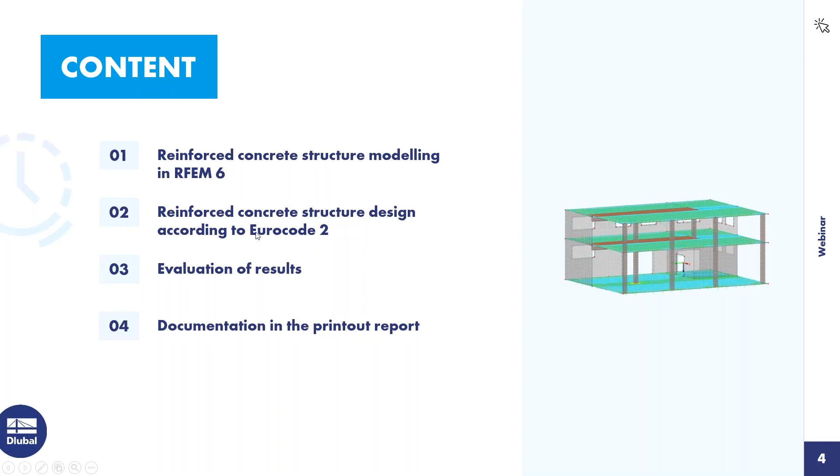I will show how we can work with the graphical displaying of the results, and also how we can print the results into the protocol in the printout report, and documentate our calculation. I will go now directly into the structure, in the RFEM structure.

The structure was already defined from the members and the slabs. I only give you a short overview about the used objects, the basics of the reinforced concrete design, and also the design of members, the reinforcement, and definition of members.

Also the design by using member representatives, if we have more similar members, was shown in the first webinar for reinforced concrete structures, which was made or shown in November of last year. There the basic steps are shown, how you can define the properties and settings, and my colleague Caroline will write the link into the chat where you can find this webinar. It is very good for the beginning.

So therefore, I will go now today in the design especially to things which weren't shown in the first webinar. So the punching design was not shown in so much detail, and also not the rib design.

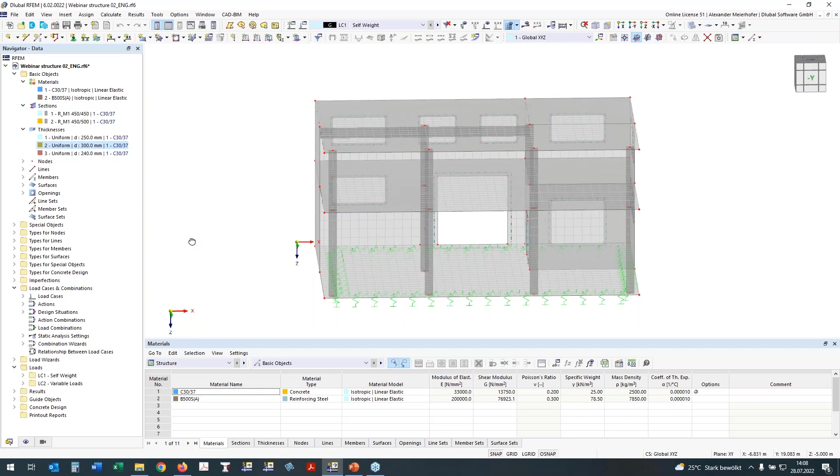The building now has elastic springs, so elastic support, and this will have also influence later in the settings for the deflection design, which I will show you.

At first, I want to deal with such nodes where we have the connection between the columns and the slab. Here we should place mesh refinements to have a better FE mesh. For this, I go to the data navigator, where by double click I can open a new nodal mesh refinement, and give my settings: radius 1 meter, and the inner target FE length is 15 centimeters.

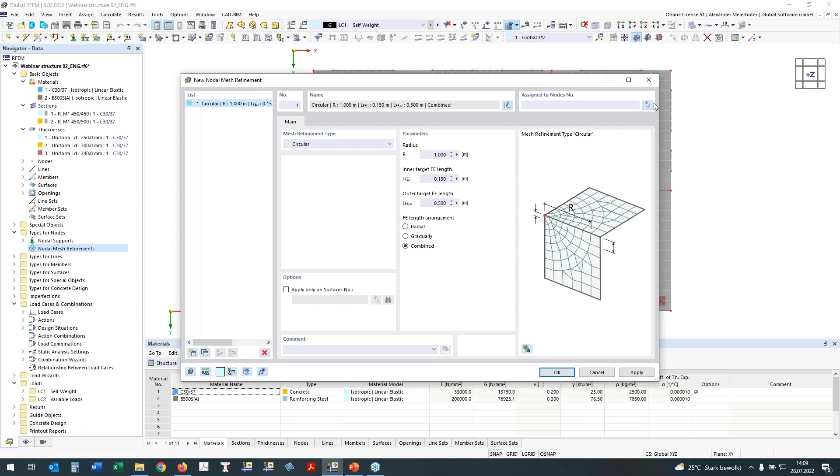It comes from the dimension of the cross section of the columns. For the length arrangement, I use the combined approach, and now I will assign the nodes with two rectangles where I want to have the refinement. If we look at it in the isometric view, we see I have it captured, and everywhere now has my mesh refinement.

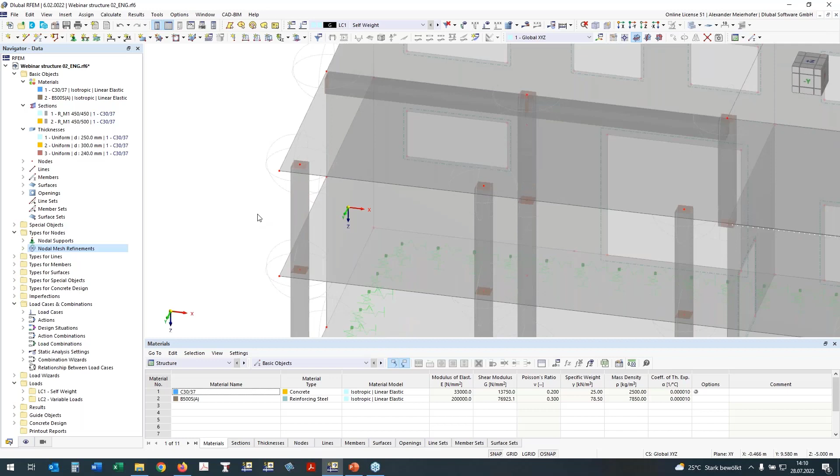On these nodes, from the column and the slab, we also have singularities, and how we can deal with these singularities in the concrete design is described in a very good knowledge base article on our website, which I want to advise you to read. Caroline will also send the link to this technical article in our chat, so you can find it very easily.

I will continue and select one approach, which is the use of the surface result adjustment. It means I will select or define the area which is exactly the width of the column, and set there the inner forces of the surface to 0.

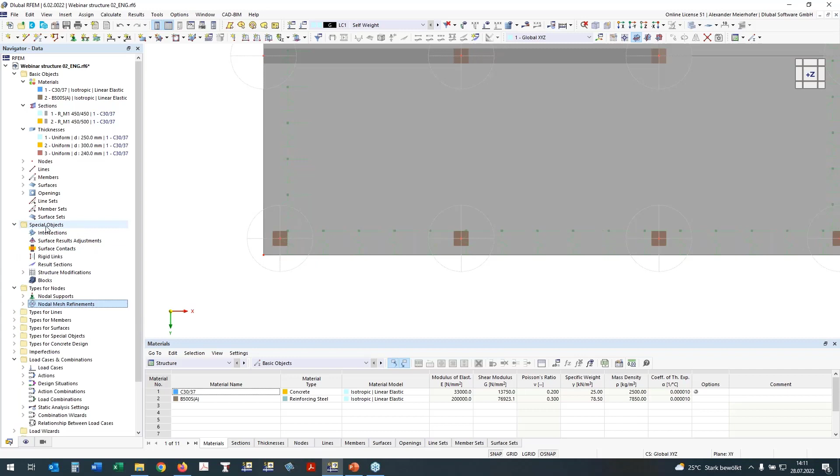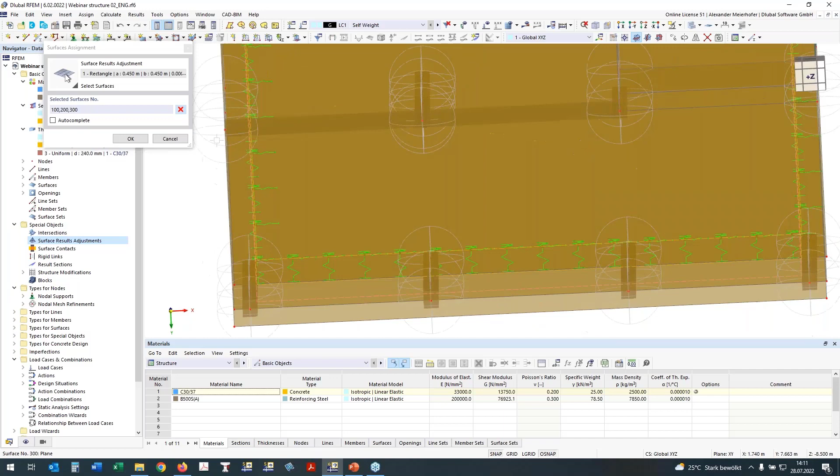Surface result adjustment can be found on the special object. By double click, I can open the dialog, and now we can define a new rectangle result adjustment with the dimension of our columns. I want to have it on all 3 surfaces, and you see the numbering of my surfaces was chosen so I know where each is placed. So 100 is the slab on grade, 200 the slab over the ground floor, and 300 is the slab over the first floor.

If I press OK, I have already assigned the surfaces, and now I have to define the center of my adjustment. Here, by copy, I can simply copy this adjustment and set only the new center of the result adjustments, and then I will have it in all areas.

I make one new adjustment and want to define it also over the wall. The width is 25 centimeters, and I define a little bit bigger area, and place it here because here is a wall. I define it also in this area.

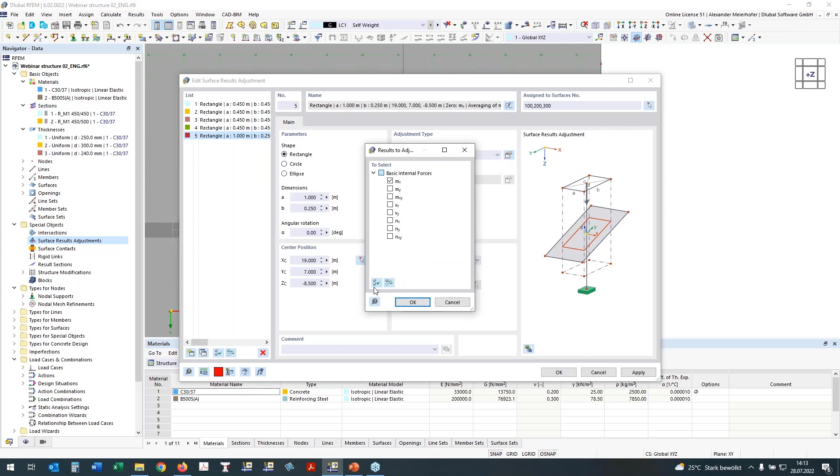I made one mistake - now I forgot to define the adjustment type. I want to set it to 0, and set all inner forces to 0, and this should be done for all defined adjustments. So I was one step too fast before - this should be done before I copy it, and then it is always in the right setting. By OK, it will be placed.

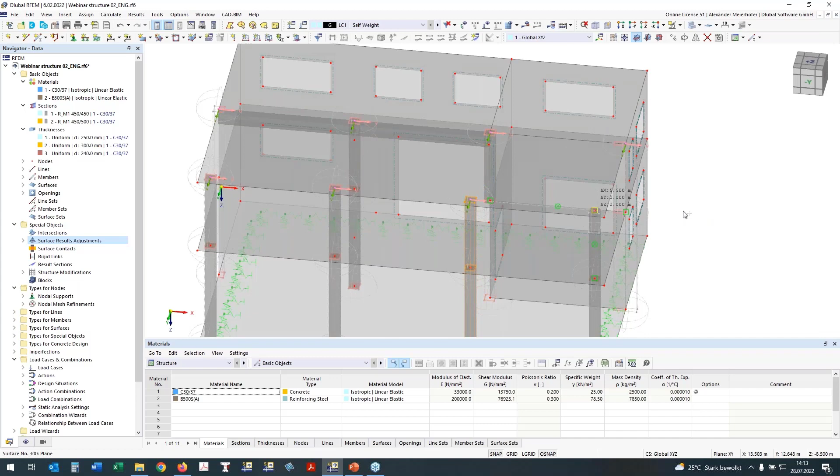We can see it, and we can also work here by drag and drop. We copy it by drag and drop. If we press the Control key, we can place it by drag and drop, and it's very simple to work with. So this is then for the connection of the columns to the slab.

One additional setting for the slab is necessary. I want to have hinges over the length of the supported line. The definition is very simple: we make a double click on the surfaces, and the edit surface dialog will open. Activate hinges, and in hinges I click to select lines, press Control, and then I have selected 3 lines where I want hinges. The hinge type is, by default, already the moment hinge, and I will apply it to all lines, line hinges number 1.

Okay, it's ready now, and if we take a look at our refinement, it is placed everywhere, and also the adjustment. In the display navigator, we can deactivate the mesh refinements because I don't need them anymore for the work now, and the graphic is then more clear for the presentation.

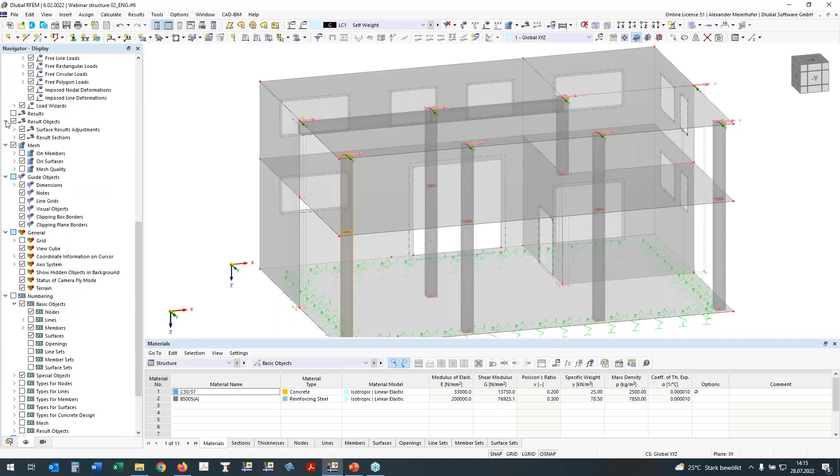Display properties - okay, it's also here. Display properties are placed now under the results objects, and then it's also deactivated.

As next step, I will define the rib for the slab over the ground floor. For this, I will hide the first floor by selection, and now I have the first floor view.

By using new member, I can now define a section rib by selection of section number 2, which should be used for the web. The web should be 500 millimeters high.

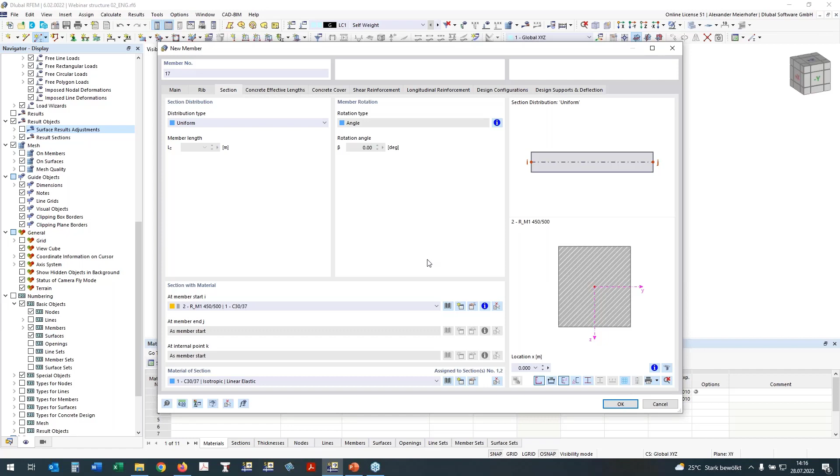I can define the rib from here to here, and also from here to here. Oh, something was wrong. Okay, I'll do it again.

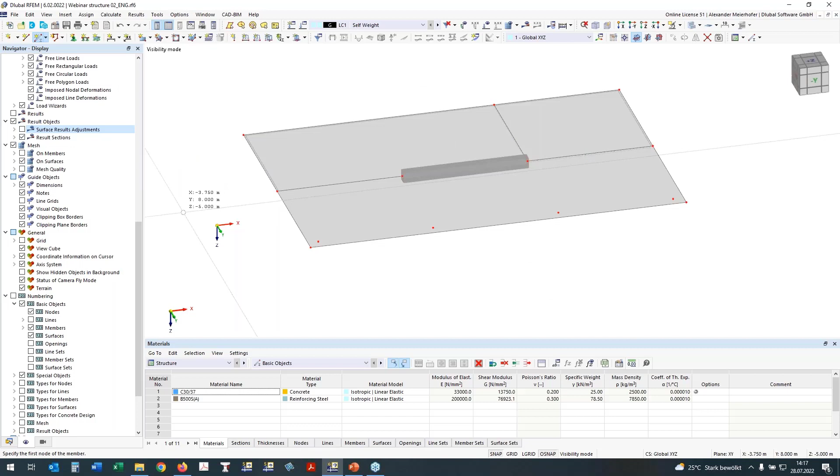I know what the issue was. I will make the selection new and select only the slab which I want to show. So the new member is the same section, section number 2, and then from here to here. By escape, I come to another point.

So if we take a look at the complete view, we see in the first part I took care of the rib. I go now into the rib section, and this is a very new feature - we can now also define more sections or segments during one length of the members. This is completely new developed.

I use here the calculation of the width, the integration width according to Eurocode 2, and the splitting of the segments can be done in 15%, 85%, and also 100%. Now we have more integration points. Here we have an inner support, which means we also have to consider the length of the neighboring span for the calculation of the integration width. So I have to define here 1.80, and now I have my different integration widths.

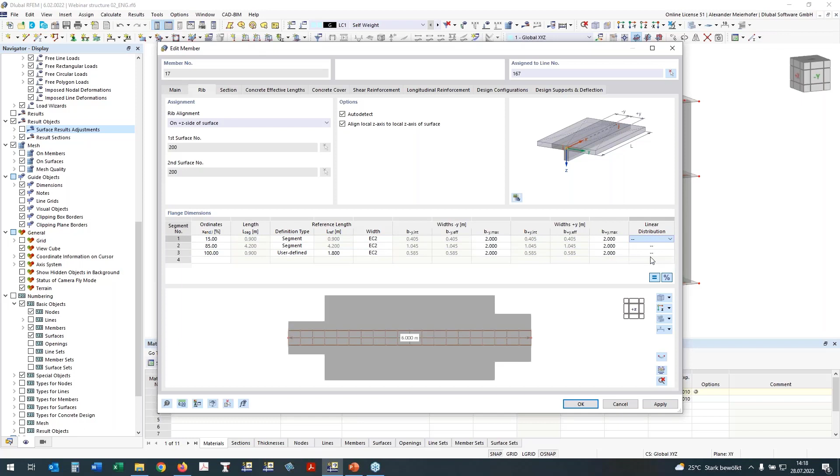We also have a new option to make a linear distribution from the integration width, and now we have defined the rib for the design.

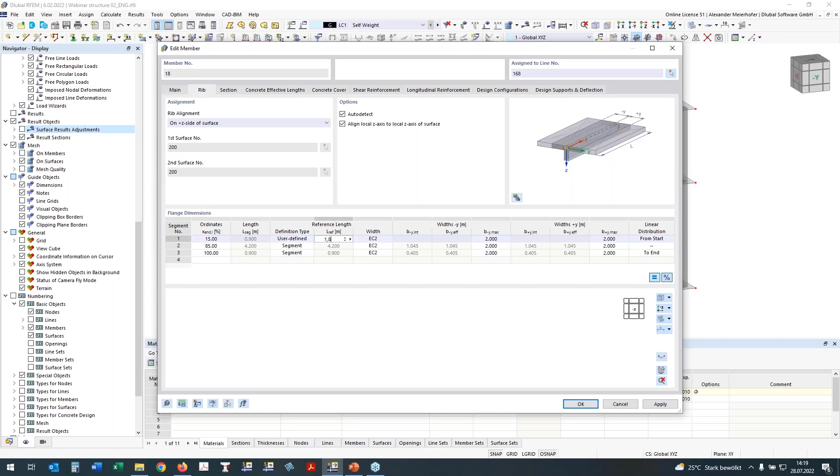For the second member, I use the copy of object selections - it's a very nice tool. If I click here, we have really copied all inputs. It's a rib, and the only thing I have to change is that the end field is related to the segment, and this is for the user-defined 1.80. Then the inputs for the static analysis are ready.

And now I do it again what I did before. A very nice feature from RFEM 6 is that we can show the rib section also in the graphic, and we see that the integration width is also shown here in our main RFEM graphic.

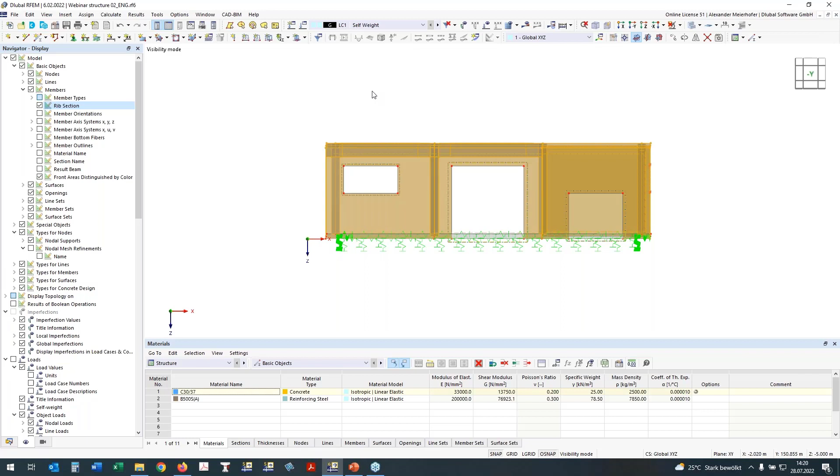Okay, now I will select again my slab here and continue with the definition of the design properties. The design properties for the reinforced concrete calculation are activated by double click. I come into the surface dialog, and I continue with the concrete cover.

The concrete exposure durability is defined by the exposure class, which defaults to XC1. This is what I'll leave - it's okay. The design direction of the reinforcement has the first direction going in X. This is also default, which I will not change.

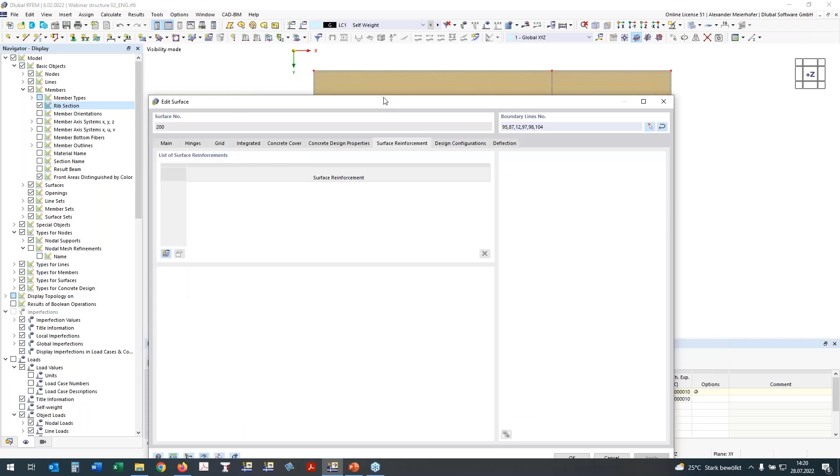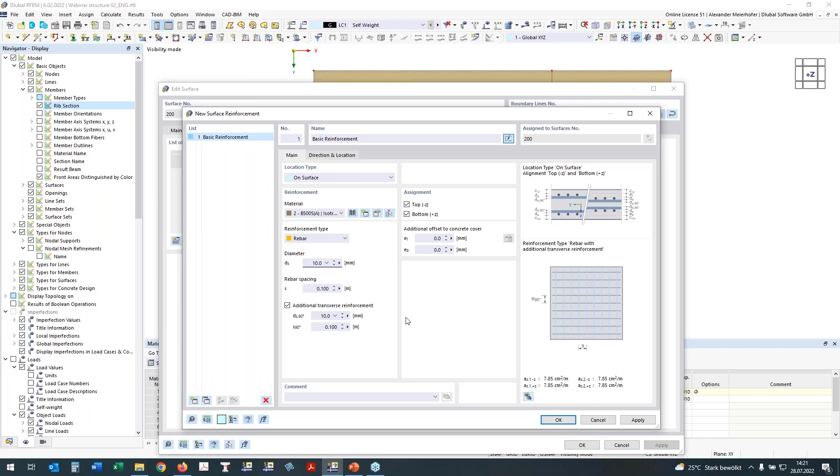And here is one important topic. In the surface, I need a surface reinforcement for the diameters so that I know the statical depth for the calculation. I just design a type of basic reinforcement, which will be in both directions, diameter 10 with a distance of 10 centimeters, and by pressing OK it will be assigned to the surface.

Here are listed design configurations, which I won't discuss today - this was covered in detail in the first webinar. I will later take a look at the serviceability configuration.

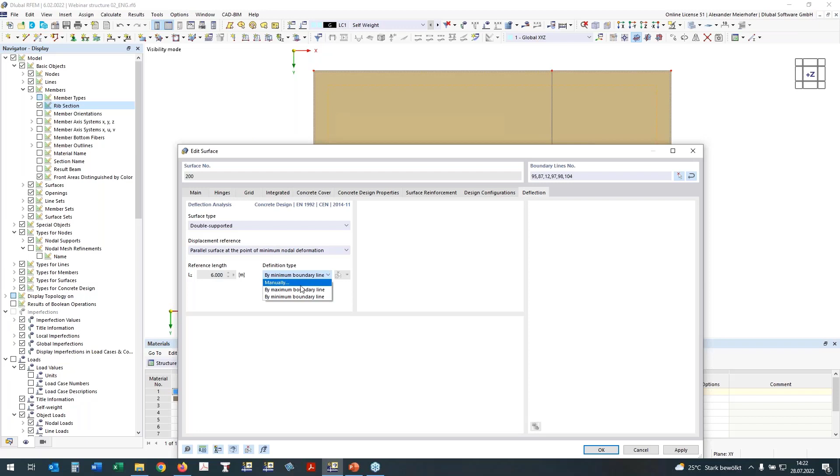But here's one very important thing, which I mentioned at the beginning: we have an elastically supported structure. Therefore, it's an advantage to relate the deflection to a deformed slab or plane. Here I use the parallel moved slab as a reference plane for the deformation, and as reference length I'll define it manually by 2 points - my reference length for the maximum allowed deflection is from here to here, about 5.5 meters. By OK, I have defined all properties for the reinforcement design.

We can also take a look at the graphic. If we go to the types of concrete, we see here we have surface reinforcement longitudinal, and if we activate it, we see that the reinforcement is defined in this area.

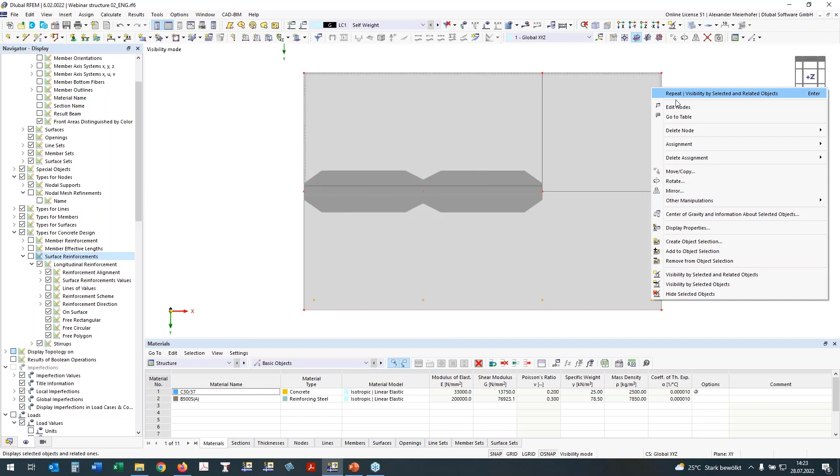Okay, I said I would take care of the punching design of the nodes which are here. So as with all objects, we have to select it and go into the nodes or object dialog, edit nodes, and activate the design properties. Here it's only important now that we check for design of the punching groove, and then we will have assigned the punching groove in the add-on concrete.

I will go now to the definition of the ribs. Here we need also reinforcement. I want to design not two members, I want to design it with a set of members.

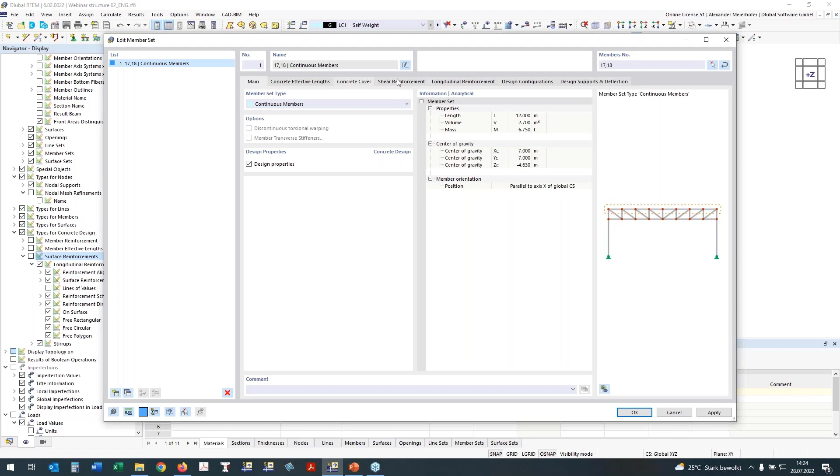So therefore I select both by pressing the Control key, and they create a new set of members. Here we have now the new set of members, and I can say design properties for this set of members, and we see that now all inputs for the design properties are open. It means the concrete cover is now shown, and here we have also the same durability which we have already used for the slab, XC1, and the shear reinforcement.

I will change the distance to 50 centimeters, and if we take a look in another view, then we see here the cross sections, or the variable cross section of the rib, is already shown here, and also there is the reinforcement, and I will go to the longitudinal reinforcement.

We see here the reinforcement which we have defined for the slab design is already placed here. If we go more we will see it. It is activated by this icon. If somebody doesn't want it, you can deactivate it or let it. I want it, so therefore I will let it here.

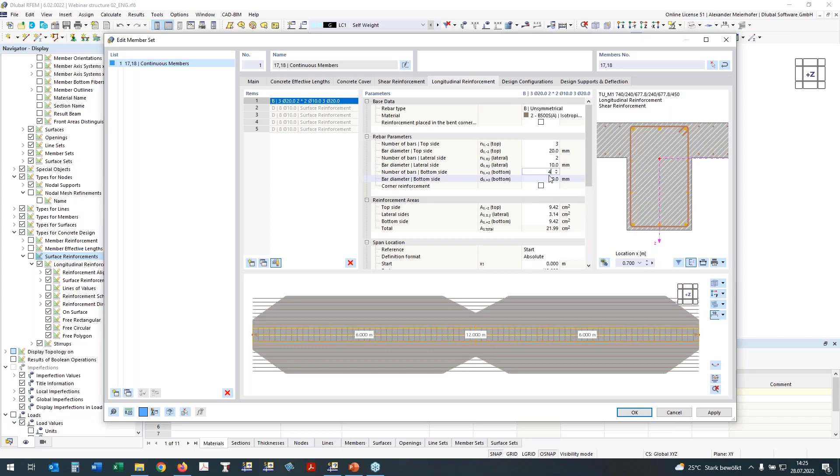But I will define now a different distribution of the longitudinal reinforcement. I want to have it unsymmetrical here in the web. So therefore on the top side I will define here these three rebars with diameter 20, but a lateral reinforcement also of 2 diameter 10. And on the bottom side I want to have 4 diameter 20. And it will be directly updated here in the graphic.

Here is also the 3D graphic of the reinforcement, which can be used for control of the inputs. Here we see a small reinforcement drawing, also the used shear reinforcement, which can be activated or deactivated. It's nice for control and for printing. Okay, I can close it.

Design configuration is the same like for surfaces in all parts. And now there's one important tab. We have to define now the deflection properties or conditions. I want to check it only in the deflection in Z direction for the gravity loads, of course.

Here is the point: my reference is then the deformed segment ends. This is now also the point which I mentioned. We have an elastic supported structure, so it means also the supported ends will be a little bit displaced in Z, and this I don't want to have in the design check for the deflection.

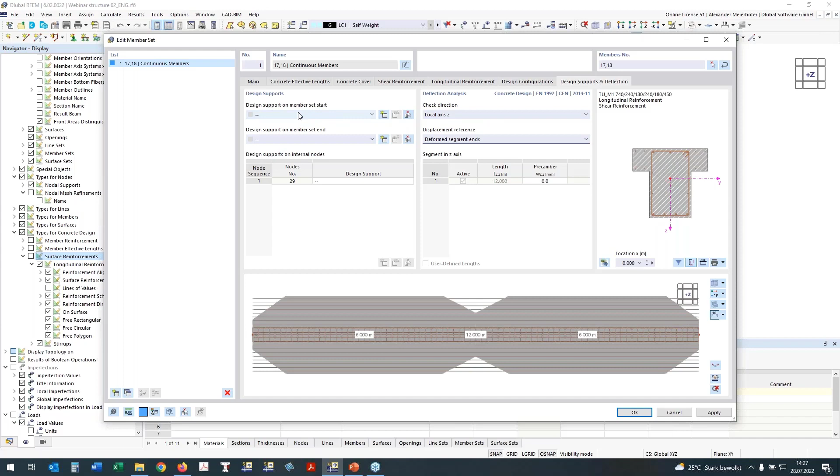Important is that I generate on the ends or in the middle some design supports. We have here design support in Z direction, and our wall is 250 millimeters. It's a monolithic connection, and will be used for the walls on the end and the start. I directly copy it and use here also the width for the columns, which are inner supports, and here I have to deactivate inner supports and press OK, and then it will be placed directly at the beginning.

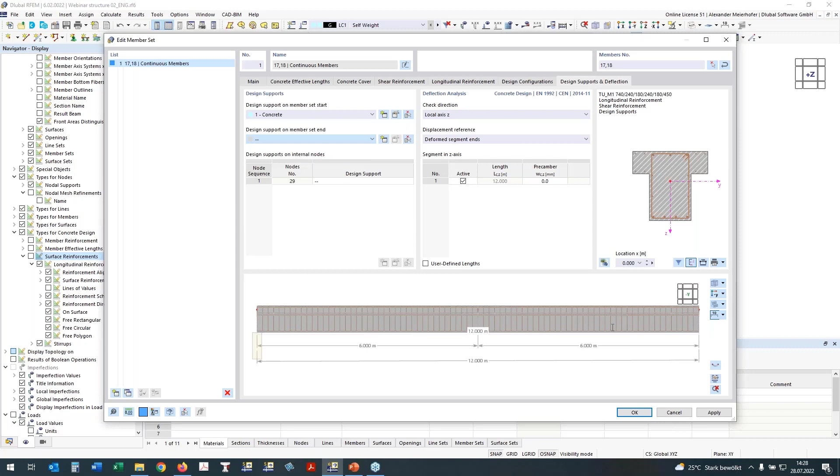I will change here the view to see it. Here we have the first one, and at the end it will be also placed, with the 250 millimeters width. And in the center I will also use the design support, but it is now for the column and it's bigger, it's 450 millimeters.

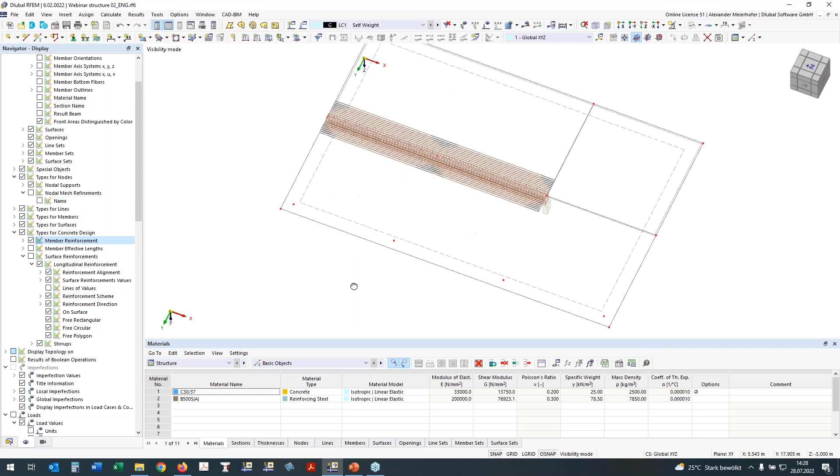And we see here now for deflection we have some lengths, 6 meters and 6 meters, and if we have some pre-camber we could define it here, but in this case I don't have it. But okay, we can confirm the inputs, and also we can check the member reinforcement and display it, and see that everything is okay.

Before I start with the calculation, I will make now new object selections. I have to be a little bit bigger. Create new object selection, and the advantage which will be done with this object selection you will see immediately after closing the dialog.

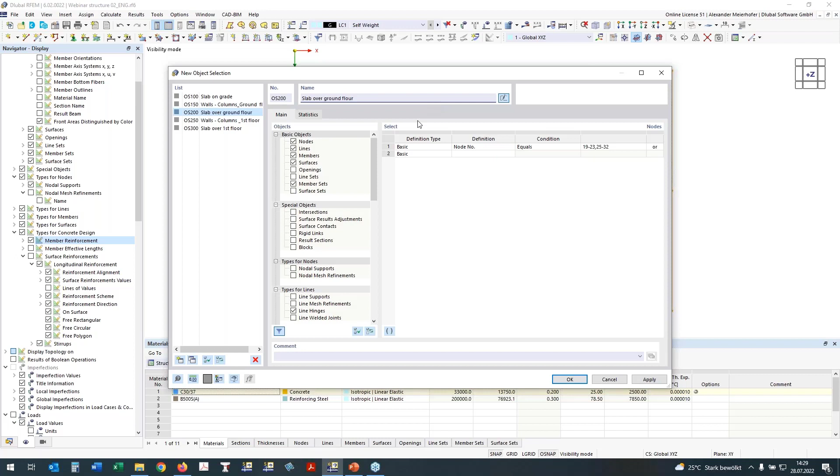This is my slab over ground floor, and I press OK. And now we have here in the guide objects, the object selections, and you see I have already done a little bit more, but the new one is the object selection number 200.

And if I go now to the concrete add-on, I can use the object selections directly to define all objects which are there in the add-on. It is then replaced, and it will only show the object, and it is very good to organize the work.

Before I start with the concrete design, one hint where you can start, or what you have to check in the basic settings: you have to activate the concrete add-on in the design add-ons, and in the standards you have to define the used standard for reinforced concrete design.

Here I will use Eurocode 2, with the original rules, so without national annexes.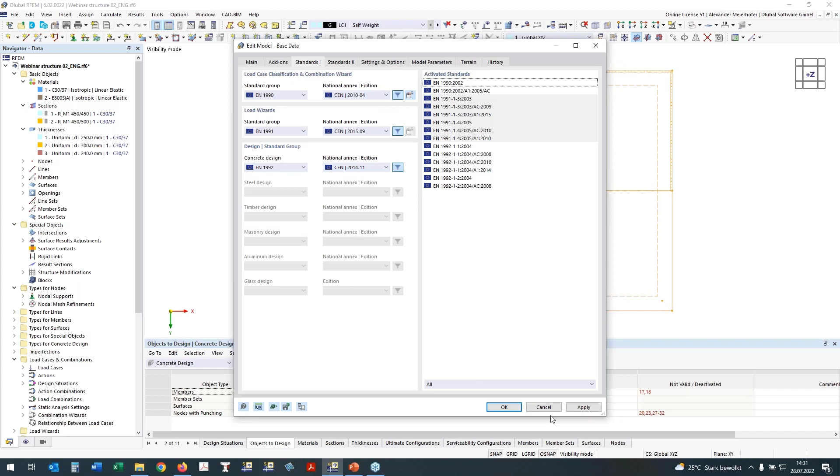If we have the loads, this is also one additional hint. I have defined a load case, self-weight and variable loads. We have to define the action category there, it's for the office. And in the base data, I have the combination group and the combination wizard defined. In the design situation will then automatically be listed the serviceability and the ultimate limit state design situations.

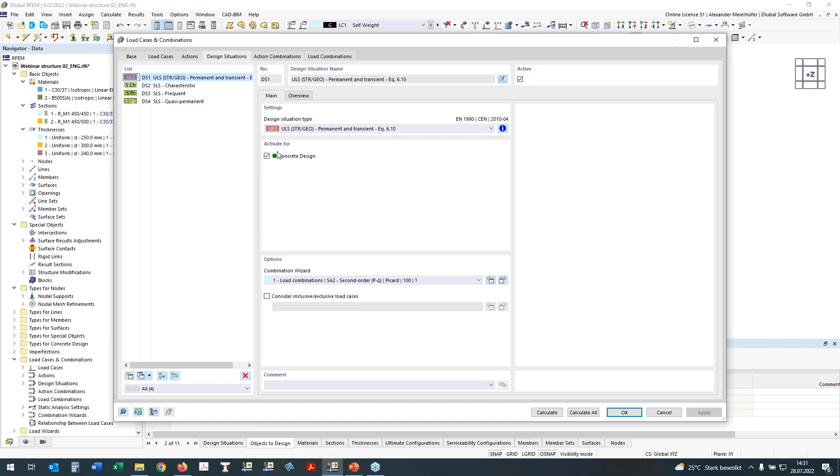Here will be the list of all activated design add-ons. We work only for the concrete design here, so I activated it for the concrete design, and all load cases which are related to this design situation will be calculated.

I can multi-select it, and what I have to do is select my combination wizard. The combination wizard here is defined in this way, that we have to generate load combination, and the static analysis should be done by first order and geometrically linear.

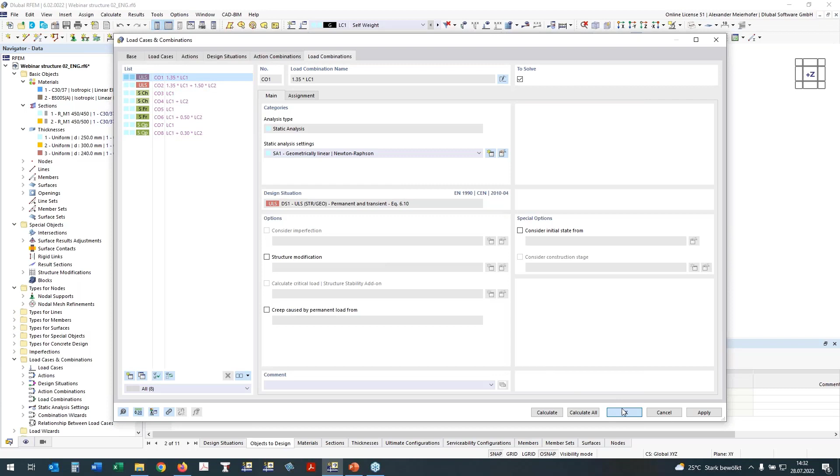If we go then to the register load combination, this combination was generated automatically and will also be used in the design of the reinforcement.

Now I go back to the add-on concrete. We have here already designed the object selections. Material and sections are only listed for control. Here are the configurations or settings which should be used for the ultimate limit state.

Here we have the serviceability state. I will take a look at the serviceability state configuration, and here we have the stress check, which should be done, or the crack analysis should be done by finding automatically the limit value for the crack width. So it is here according to the exposure, the defined exposure class. We have XC1, so therefore I expect in the calculation 0.4.

With deflection calculation here, we have this L, the reference length divided by 250. And here is the crack state detection for the serviceability.

This I want to explain a little bit more, because this is really new, which we released 2 weeks ago, and therefore I'll take a little bit more time for it.

The first one is the crack state calculation for each associated load. So each load case or load combination will be considered and calculated for itself.

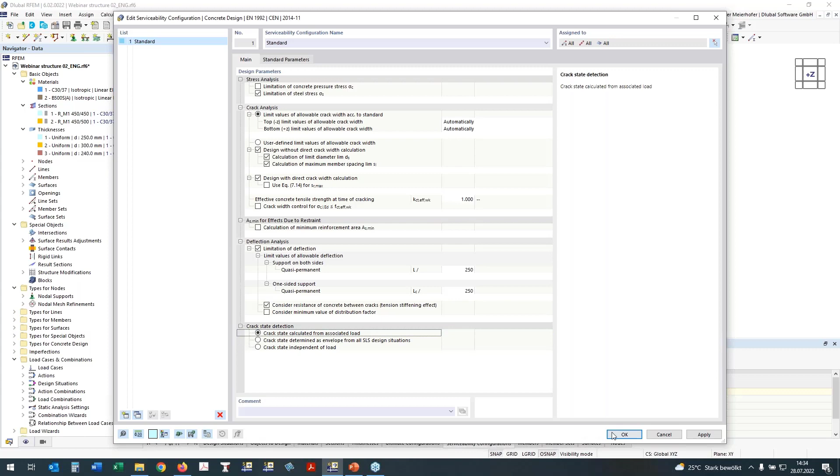Calculate the deflection only in a cracked state, independent of the load. It means all elements will be considered as if they were cracked. I'll add it in the first setting and confirm it.

Now I think we can already start the calculation of the static analysis. So firstly the mesh will be generated, and as the next step the static analysis is done. And you see here we can now use more cores of the PC. I have 4 cores, and there will be 4 calculations in parallel.

It is very fast. Here in the concrete calculation, a pre-calculation of the stiffness will be done, to check if there are cracks or not. Then a second step of the finite element calculation will be done, and the deflection will be calculated. And in the last part of the concrete design, the cross sections will be designed, and the results will be prepared for display, in the table, and also in the graphic.

Okay, so now we have an overview of what is fulfilled and what is not. We have very detailed tables. This work with the tables was also shown in the first webinar. Today I want to work more with the graphics, and use now only the settings for the member.

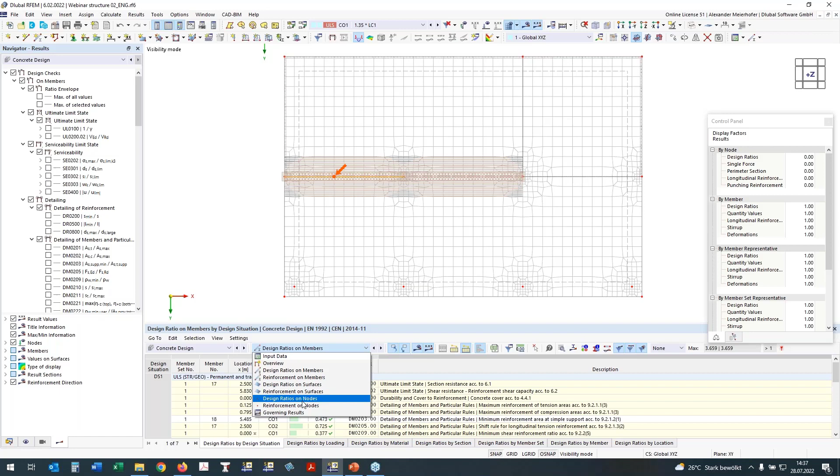The design ratios, one thing more, are also differentiated or sorted by members, by surfaces, and by nodes. Design ratio for nodes is also new, and this is the design ratio for the punching proofs, and we see here it's not fulfilled.

I will go now to the graphical results, and firstly we took a look at the results of the surface. I want to activate it as only extreme values, and here we have the panel showing the ratio of the defined reinforcement, the ratio between the provided and the needed reinforcement.

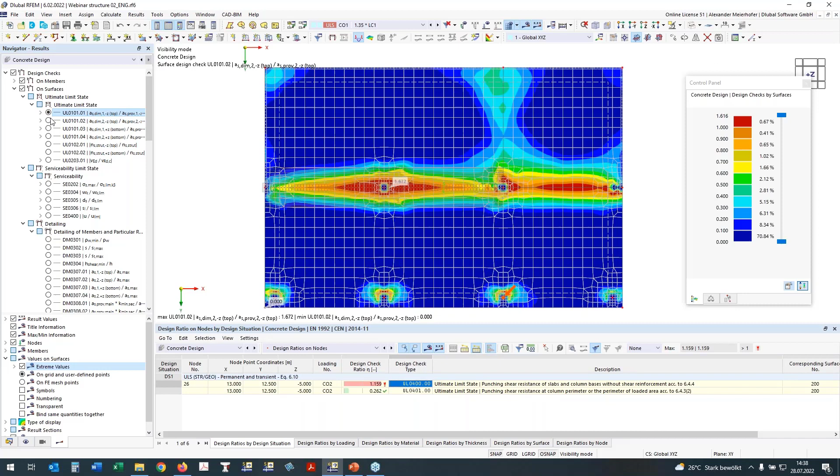Here we see in the red areas less reinforcement defined. On the top side, here is also a punching problem. I would expect, of course, more reinforcement here for the punching design.

If you take a look at the bottom reinforcement in the first direction, we have here everything in the green area. The maximum ratio is also on this small part, but the main area is under 1. The second direction, bottom reinforcement direction 2, is also okay, with a ratio of 93%.

The punching proof of these nodes is now shown in the register in the tree for nodes. If we activate here the vEd for nodes and vRd,c, we see the corner columns can be designed, but the columns in the center are overloaded, and we need more reinforcement there.

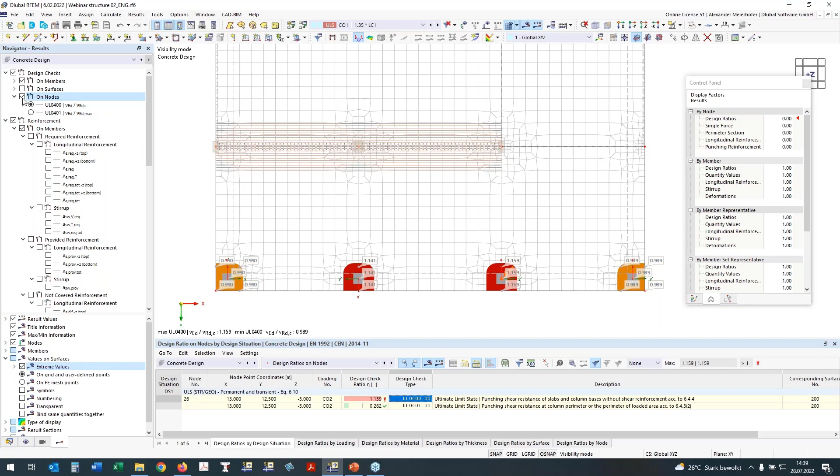To work with it, I will go now to the reinforcement and take a look also at the nodes, and show if we need a required punching reinforcement. Here we see for the required punching reinforcement we need 0, but we need then longitudinal reinforcement. In the configuration I said please calculate the required longitudinal reinforcement to avoid shear reinforcement, and we see if we would place 12 or 13 centimeters, everything would be nice.

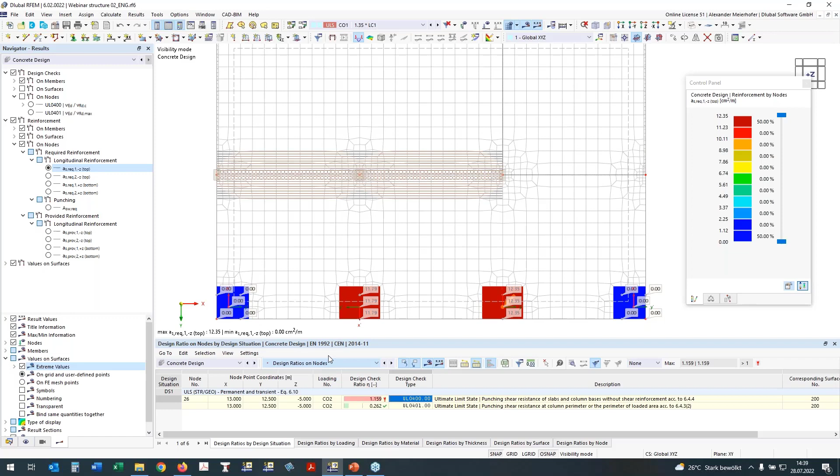I will now define the missing reinforcement. For this, I will go to the global settings of my module add-on, and deactivate the deletion of my add-on results if I change the reinforcement. Now I can work in the inputs. I deactivate also the mesh so that I have a nice view, and go now in the result navigator.

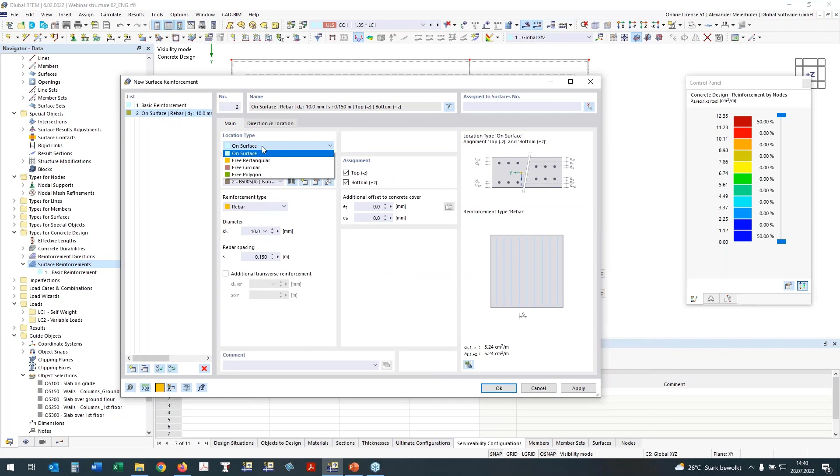I go to types for concrete, and for types for concrete we have the surface reinforcement. With new surface reinforcement, I generate a new one, which is a free rectangle area. I assign it to my surface number 2, and the missing area here is for punching, about 7.8, and I want to have it also only in the top direction.

And here is the area which I want to define. I activate my grid to have good coordinates, so I have a grid of 25 centimeters, and this area is already defined. I copy it like it was for the advantage result adjustments of the surfaces, and I can really use the same concept here.

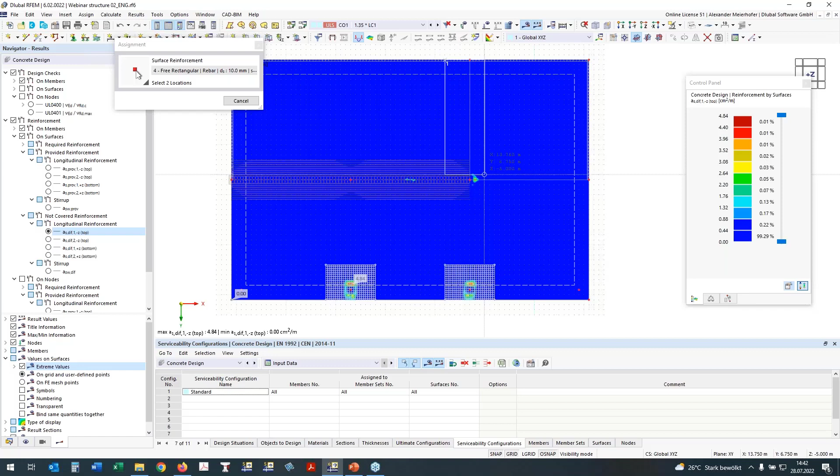Now I want to do the input also on the other missing parts. For this, I copy the existing one and go in the result navigator, so we can activate our graphic for surfaces and say the surfaces have a not covered reinforcement on the top side in this direction. I will define the same area over my supported line in the first direction, and in the second direction I will do the same area. Here I need also some reinforcement, and took it over this length.

It was a little too small, so you can also make it again, and by pressing OK, it is then confirmed, and it is in the structure.

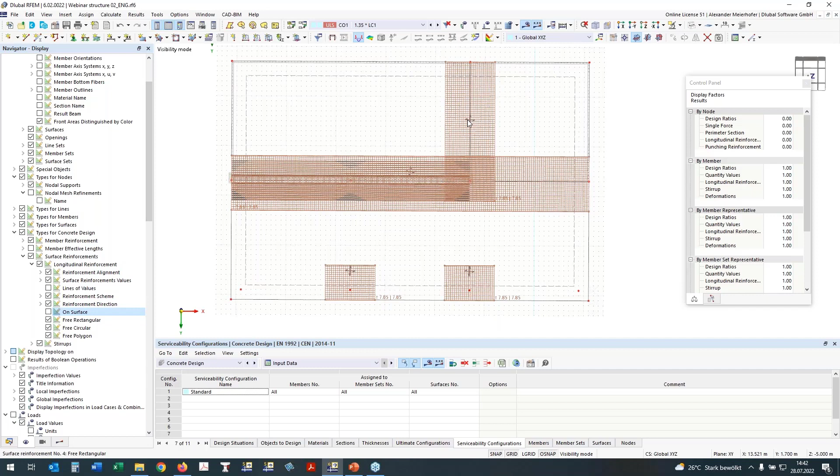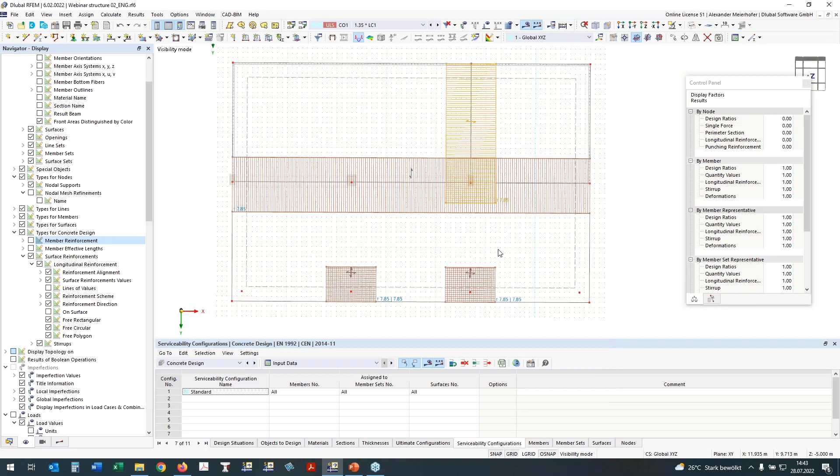For the surface, I can then take a look at where my surface reinforcement is. I go to the surface reinforcement and deactivate on surface, and we see what part of reinforcement is defined, and I can also check if the direction is right. Here I have defined one thing more than needed, so I only want to have one direction, and it's the same here. By OK, we will see I have only one direction. So easy is the definition of this additional reinforcement.

Now I want to take care of the reinforcement in the rib. For this, I select it and change the view, and generate also a new object selection, which will be the T section.

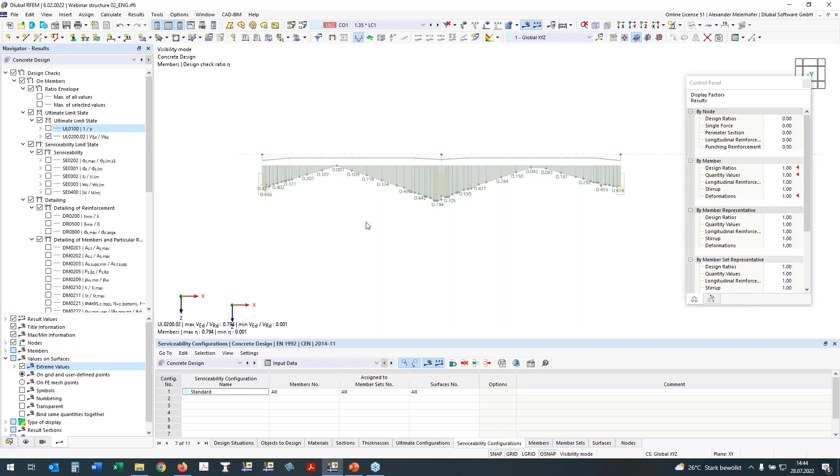Press OK. And here I work now with the design checks on members, and take a look at how my cross-section resistance is. We see I'm under 1, so everything is nice. If I take a look at the shear reinforcement, the shear proof is also fulfilled, so I need no additional inputs. The serviceability is also done this way, checking that the stress of the steel is within limits.

We can take a look at the crack width, and the crack width is also fulfilled. Now we want to show you the newest release. We have here the additional details in the result navigator. This is since Monday in the Grasshopper... in the new version, which you can download from the extranet of RFEM 6.

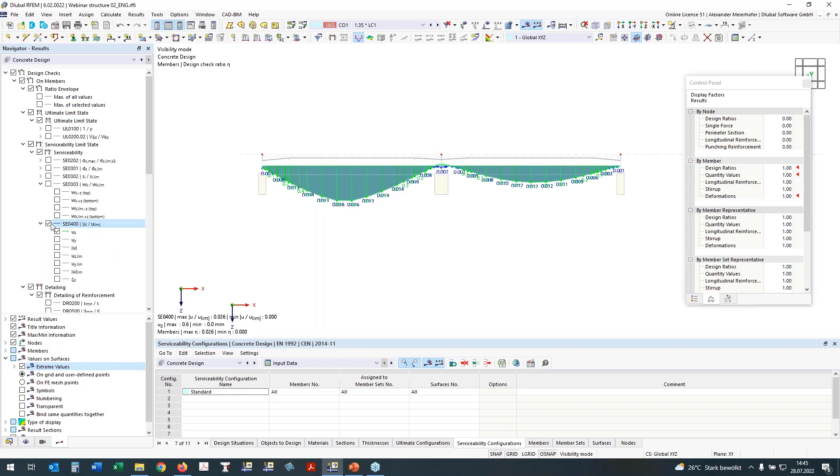You can activate here also the direct value of the crack width. For example, we have here only 0.026, and it is also for deflection. The ratio is very small, and the existing deflection is now 0.6, and we see here it is related. Here is the end, it goes to 0, and this comes from the relation to the deformed structure.

If we take a look at the required reinforcement, it is also here in the table. Required reinforcement of members, top and bottom, and we can take a look at it.

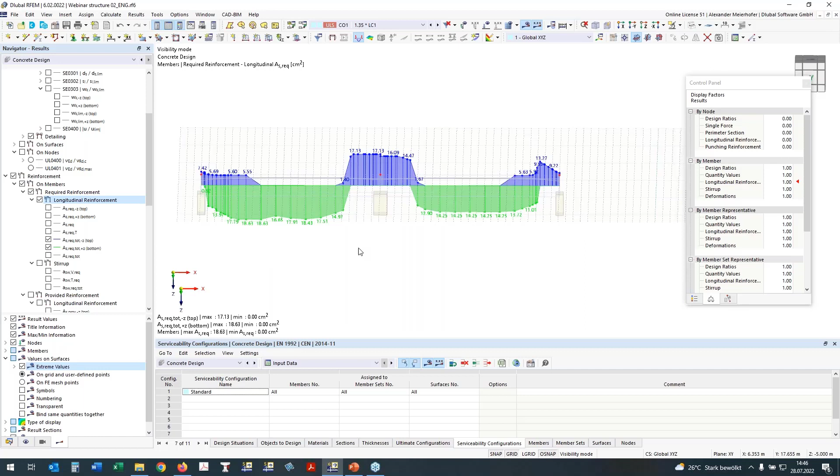You have here the graphic, and if we want to print it to the protocol, we have to generate a new protocol. But what we have to consider is that the calculation must be done again.

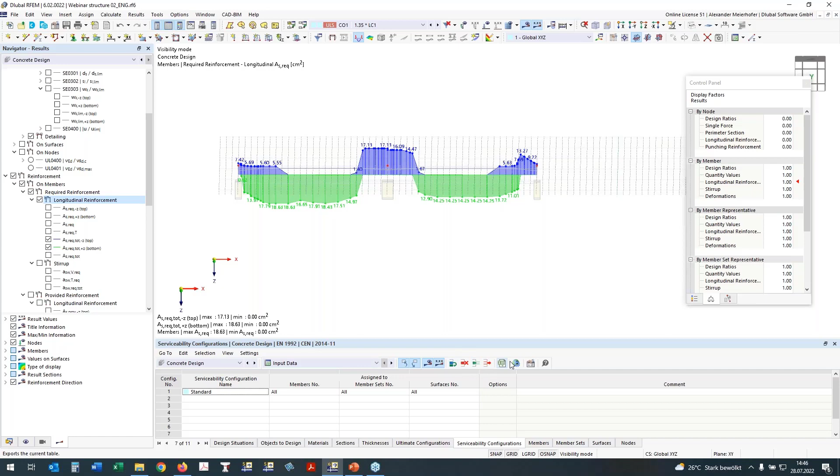We change the reinforcement. For this, I go to the global settings and activate the deletion of the add-on results, and then it will be updated and deleted. Now I have to start the calculation of the concrete design add-on again.

You can also do it here in this icon and start only the calculation of the add-on. The statically analyzed results were not deleted because the reinforcement has no influence on them. Now it is only the calculation of the concrete add-on which will be refreshed and done again.

As I said before, this is a two-step calculation. In the last step, we have here also again a concrete calculation for preparation of the results and the graphic.

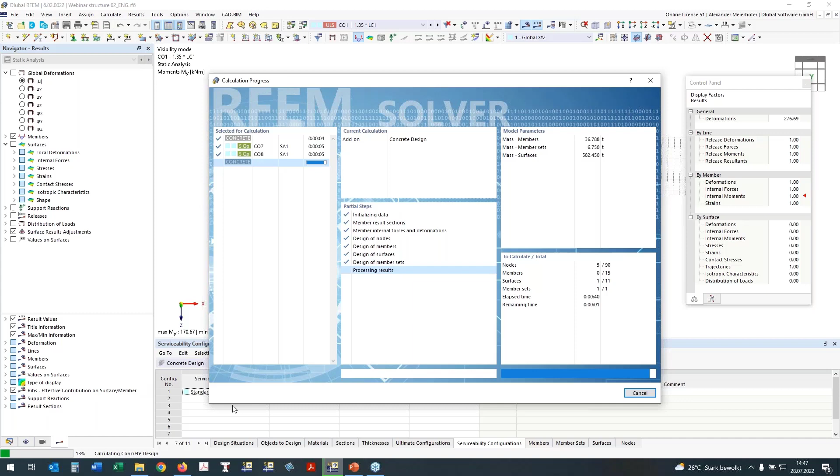Now we have the updated results. Design ratio by nodes, by members, is okay. Then I will go to the printout report in the navigator and show you very simply how to work with the printout report.

If we generate a new printout report, I make it here for the concrete results or concrete design, and assume that all other documentation of the statically analyzed results will be done separately in another printout report.

Today I want to show only the design or the report of the concrete results. So types for members, types for surfaces we don't need, but types for concrete design is necessary for the durabilities and the surface reinforcement. And what I also need is here the concrete design, which we have to discuss maybe also what is necessary.

We see here it is possible to show every tab which is also available here in the add-on. It can be printed, but I want to have here only the design ratio by set of members, and for nodes and for surfaces. The reinforcement for members should be also only shown by member set, because I design only the member set. The provided reinforcement by member set, the not-covered reinforcement I will not show. For the reinforcement by nodes, I let it like it is, and the design overview will be deactivated.

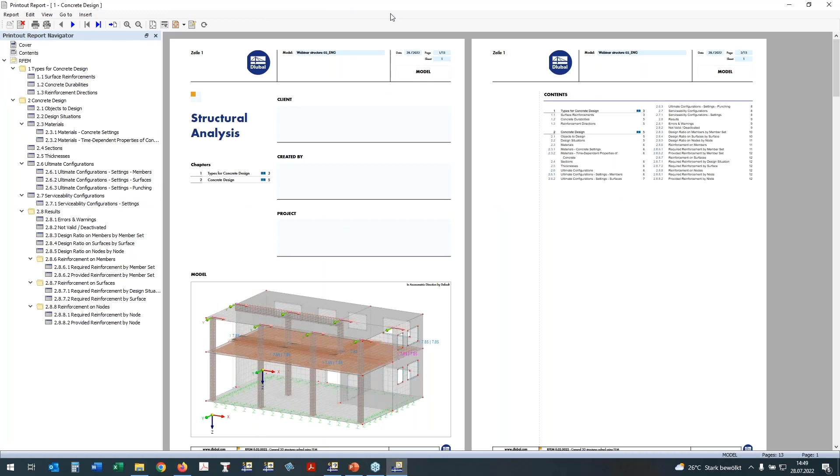By save and show, it will be generated, and the result, the printout report, is one of our new developments in RFEM 6. It is completely new. It is a separate file, an instance, which can be used here.

It can be opened parallel to the RFEM calculation. If we take a look at our results now, result members, then we go through the result of the set of members. Here is one green, one thing is the crack control, which is overloaded—we can check this later. Detailing is 1%, it's okay. So from my side, it's okay. For the design ratio of the nodes, the punching design also has all ratios fulfilled.

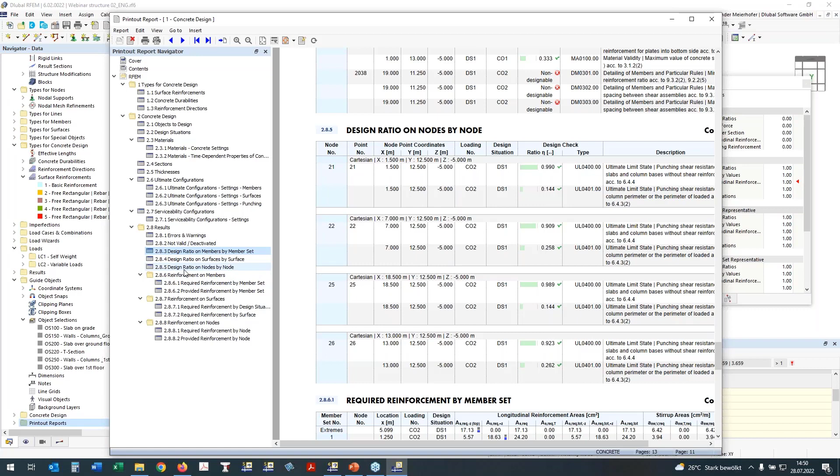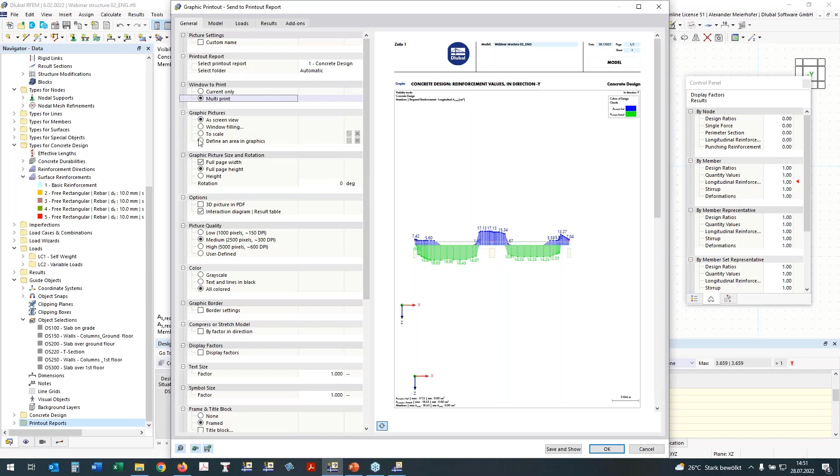If we go to the required reinforcement by member sets, we will see the list of the required reinforcement. Here I want to show also the point of how we can print the required reinforcement, because in my eyes a picture, a diagram, is better than many tables. Here we can use the printout report, the graphic, and here I want to use the current one. New is also the possibility to define an area in RFEM to print it to the graphic.

By 2 points, I will activate the grid so we can move it and make it a little bit bigger.

Okay, and this area will be saved and used for later. I'll make it a bit bigger, and the panel should be outside of the graphic. By OK, it will be printed to the protocol. If you activate it, you can see it here and make it smaller.

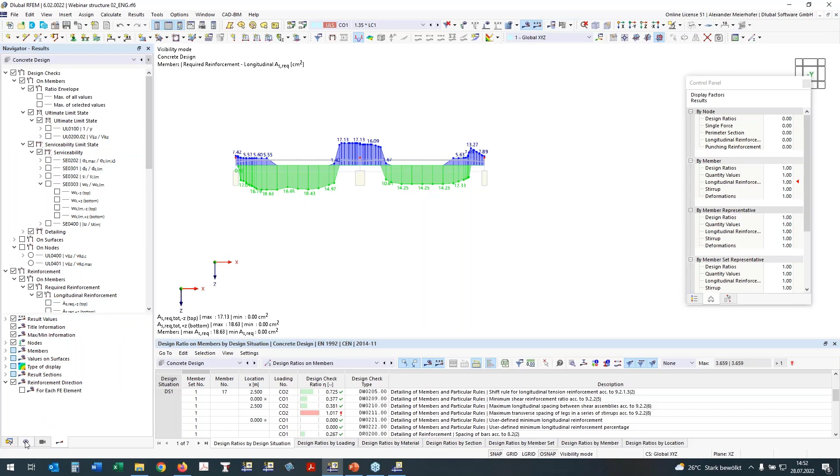Everything is here, and using the inputs of the reinforcement, we can deactivate the design checks on the required reinforcement and activate our member reinforcement longitudinally, using the descriptions. With that, we can print it directly into the protocol using the same functions.

The same icon will be pressed, so the area is the same. I don't change anything, and with OK, it will be printed. Now I will take care of the slab.

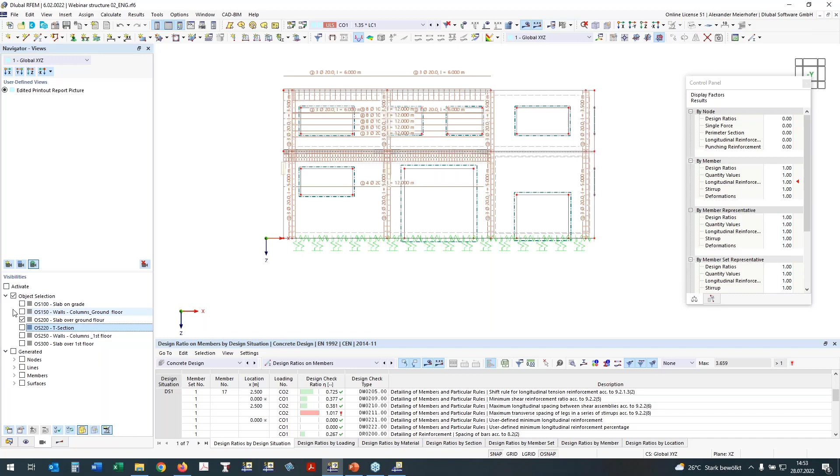For this, I will go to my view navigator, display view navigator, and this is the next advantage of the object selections. If you remember, I have here the slab over the ground floor, and if we take a look in the Z direction, now everything is activated that I selected before. I can continue with my presentation of the results for the slab.

First I deactivate my member reinforcement, and in the result navigator for the design checks of the surfaces, I go to the ratio of my longitudinal reinforcement on the top side. It is okay, and the bottom was also okay.

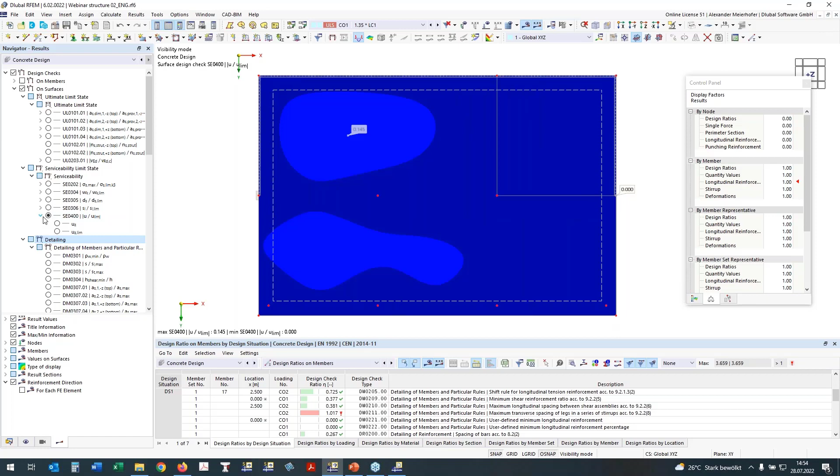We take a look at the displacement, so this is a ratio like it is for members, and here is also the deflection. Important for me now is the punching proof, because this was not fulfilled before. We see it is now under one, the ratio - it's perfect. And we can print now also a documentation of our results.

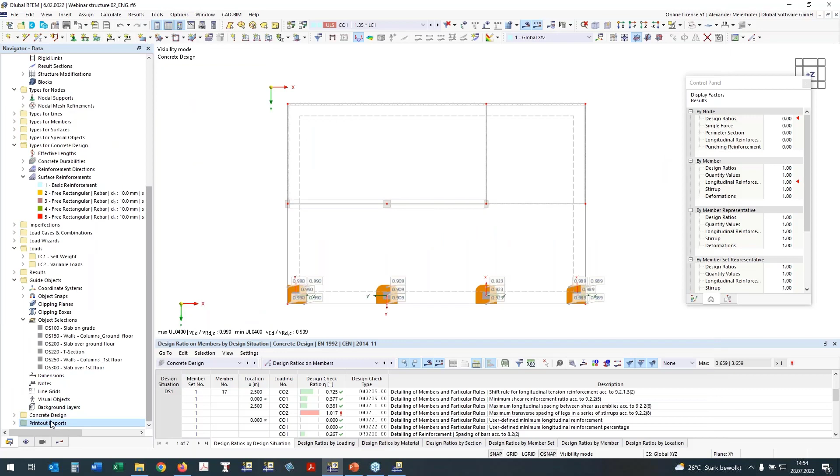I want to use a bigger paper like it was done in the documentation. The first printout report uses format A4, but I want to use a bigger format for the plots. So I'll make a new printout report and say this is only my annex for plots.

For this, I deactivate all settings here and generate a new page format. I have to select a printer which is possible to print bigger pages - here's my printer, which can print A3, but you need 7 millimeters distance on the bottom side, and I don't need a cover page.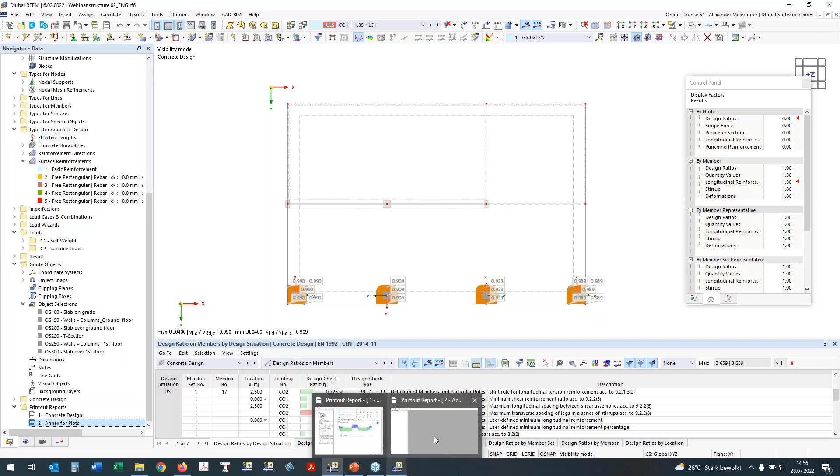And with OK, it is saved, and save and show. I will get a new protocol, which is also shown here, but it's empty until now, because I printed no reinforcement or no result there.

I want to use the same one again and print here the surface. You see the last view is saved. I want to have a new one - I want to use it in Z, defining it in the new area.

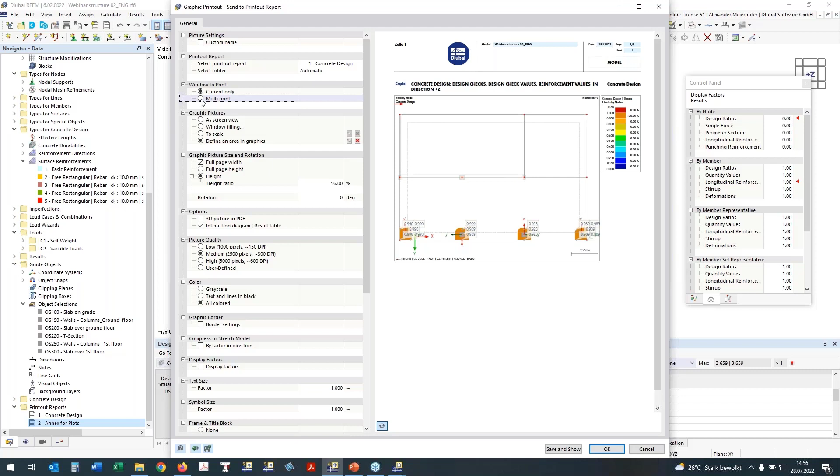So from here to here, with OK, and with the multi-print like I did before, I can go through and print all result diagrams which are necessary. The model is not necessary, load cases not, and the add-on.

Now you see this navigator is really the same navigator as in the result navigator in the main program, and we can print all results which we want.

This is a very nice graphic - on each node we see the value which was assigned in the calculation.

Required reinforcement, of course, I want to have it shown, my required reinforcement and also my provided reinforcement. For surfaces and for nodes, I need the required reinforcement on the top side, which must be placed to avoid punching reinforcement and fulfill the punching proof without shear reinforcement.

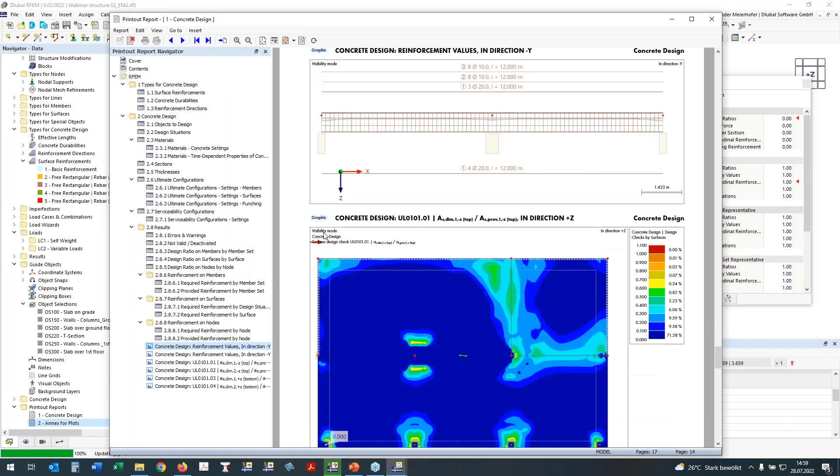Oh, this was my failure in the presentation - I selected the wrong one, so let us take a look here. The principle was the same. Let us discuss the result.

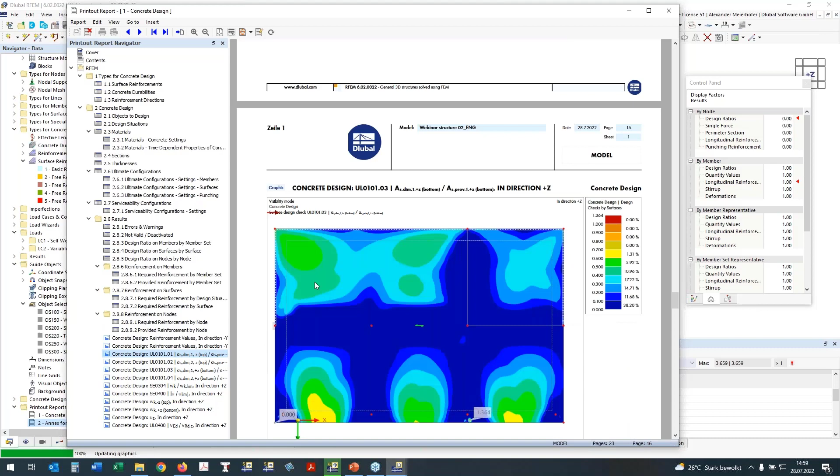It's now in printout report number 1. Here we see the reinforcement - everything is fulfilled, also the ratio of the top reinforcement, the bottom reinforcement, it's okay.

Here we have the crack width and the ratio of the deflection, and here also the crack width on the top side and the crack width on the bottom side.

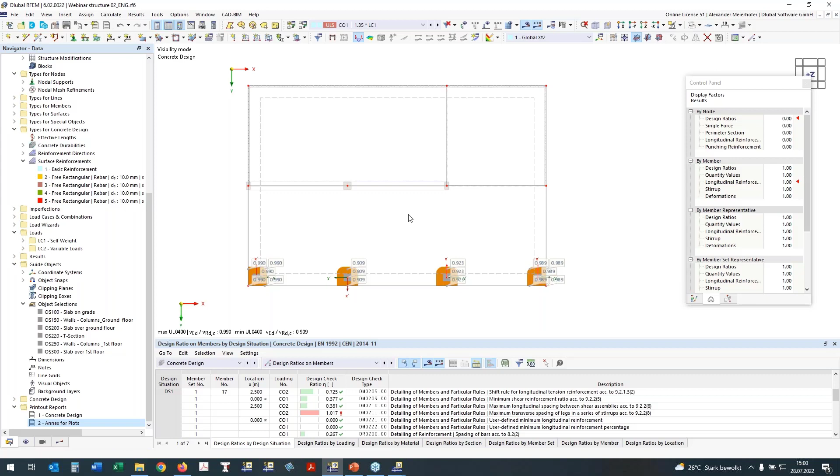Okay, this is then the design of this slab, and we are ready with the design of the member, the T section, and also for the punching nodes. I want to show you also the punching design of the foundation slab, where it is a special case.

Here we need an iteration of the critical perimeter, to find where the critical section is. It's not 2D, it's iterative. We also need to consider the soil stress under the ground slab, and this will be done now automatically.

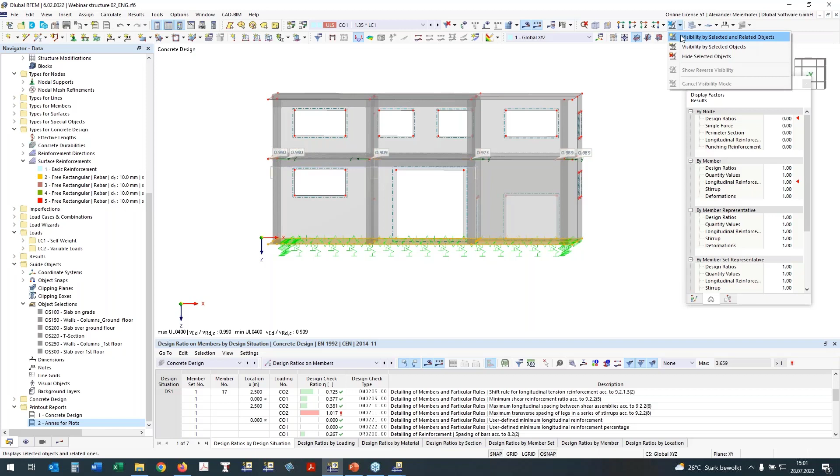I do it in the same way as before. I select only our slab, take a view in the Z direction, the same as I did before in the presentation. I have to go to the node and say it's my punching design. Of course, I have new properties. Now the results will be deleted.

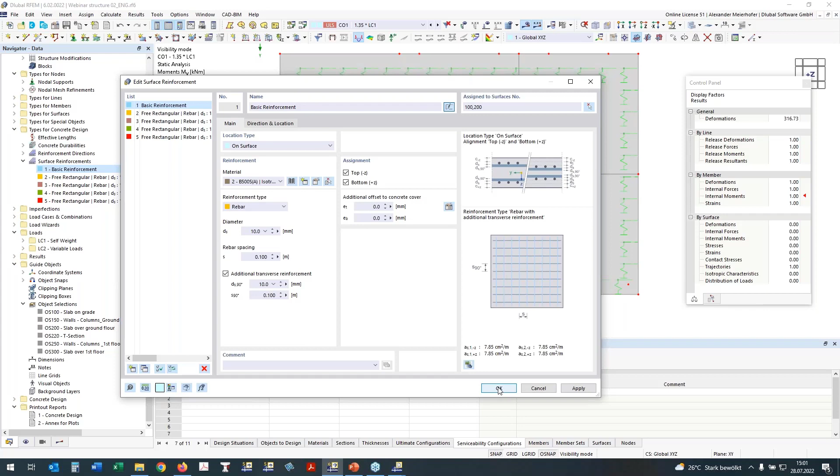Further, I have to define the reinforcement in the slab so that the punching proof can be done. This is very simple in the basic reinforcement. I use here the number 100, which I mentioned before. This will be my slab over the ground.

Then we can start the calculation of these points, if we remember. We have here different types of punching design: a wall end at the border of the edge of a slab, a corner column, a column at the edge, a wall corner in the center of a slab, and an inner column in the center of a slab. This will be done automatically in the design.

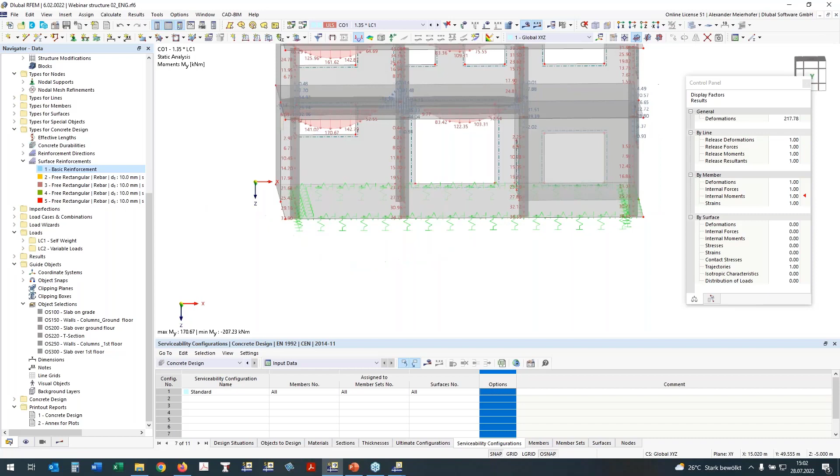I will go to my concrete design. This is now only for presentation, to show how the iteration works. I will select the same way as before and say, please design this node for the punching design. Member sets I don't want, and press OK.

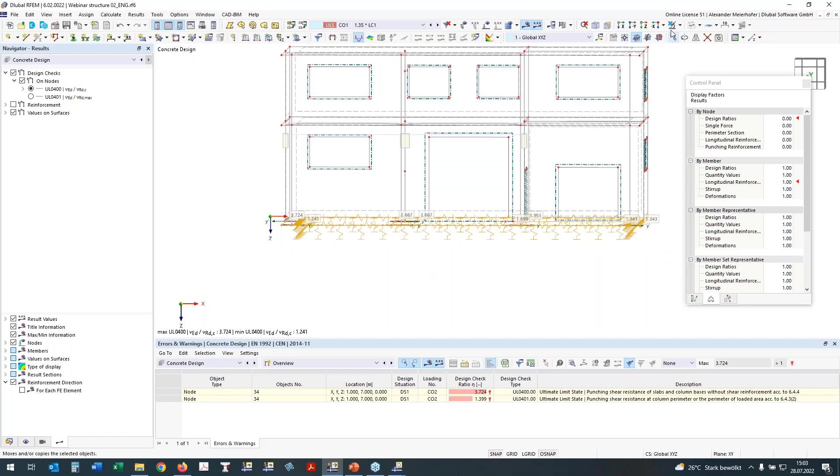Now I will calculate the punching proof for this node on the foundation slab. Let's go to another view, Z direction, it's better. We see that the wall end is found, the property or geometry is determined automatically. Here we have a wall end, here we have the columns, and here we have a corner. We also see the result of the iteration finding the critical section. Here it's a very small distance, and here we go until 2D.

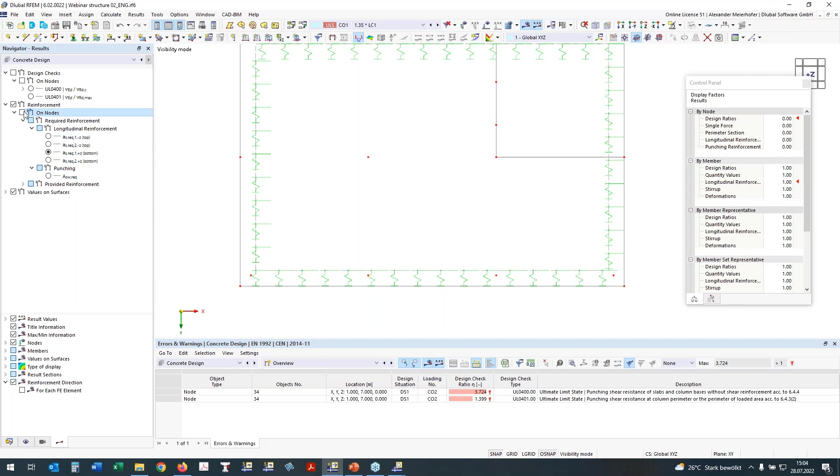This means now that the reinforcement is not enough, like I discussed before. If we take a look at the required reinforcement of the punching node, we will see if we need punching reinforcement or if it could be done with some additional reinforcement. We need no punching reinforcement; we can use additional longitudinal reinforcement instead. So the punching design for a foundation slab is now implemented and can be very simply used in your daily work in the design of concrete structures.

Okay, this is an additional topic or feature which I wanted to show at the end of my presentation. I will finish and close my presentation with the picture of the punching design of the soil slab. Thank you for your attention.